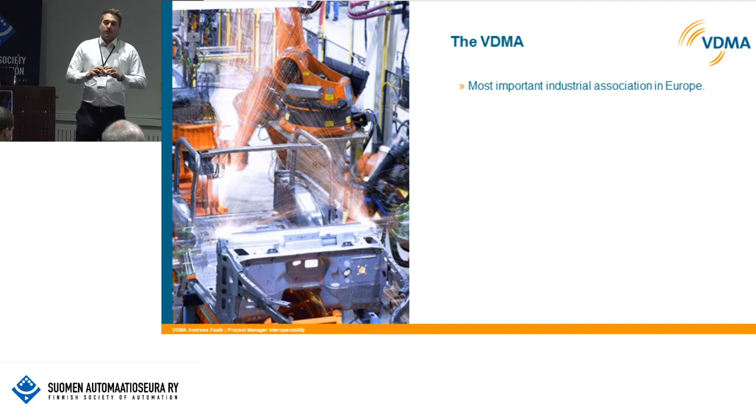We have more than 3,200 member companies, representing the broad range of the manufacturing industry. We have a structure representing the different branches of the industry in 38 trade associations. That means the VDMA is not only covering, for example, the robotic industry or the tooling industry, we cover really the broad range. So we are kind of an organizational umbrella.

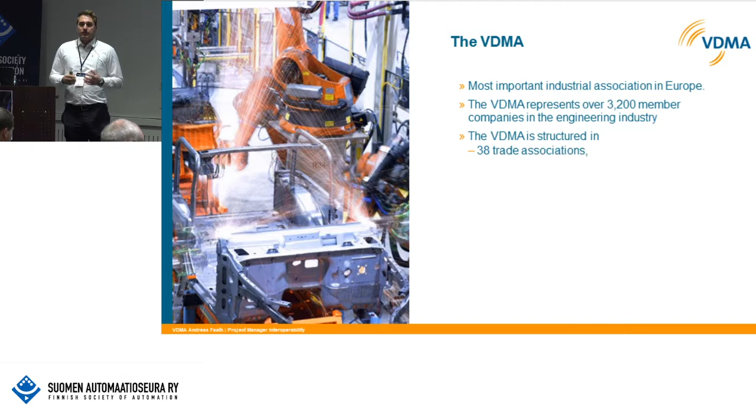Which makes it possible to interact and network closely between different industries inside the manufacturing industry. We are right now an international acting organization, so we have, for example, offices in China, India, Japan, or Russia. And of course there are other kinds of organizational structures, and importantly, we host several European and global sector committees. What that means I will explain also in the presentation.

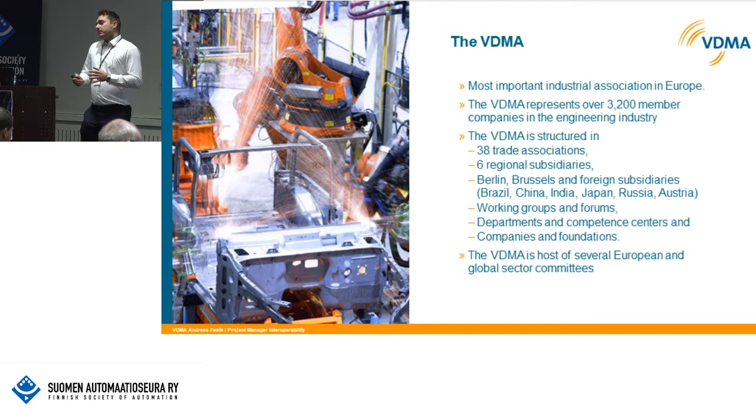So what you have to keep in mind, and what is pretty important, is that as VDMA, as I told you, we are not only representing one branch inside the manufacturing industry, but representing the broad range of this industry. So we were looking for standardized interfaces. We were not aiming just because there is a technology called OPC UA and we wanted to use it somehow. We started with the idea, and our members told us, that standardized interfaces would be key to success. For that reason, we looked for a technology that serves the needs they have.

One of the most important needs, for example, was that there should be a security-by-design approach, and of course a semantic machine description possible. This is why we are taking OPC UA and why we are doing these companion specifications together with our members, and why we are hosting that. Because the big picture goal is really to have, in a dynamic, flexible, intelligent production, the possibility that machines and systems can collaborate, can work, can interact pretty easily by just describing themselves in the production.

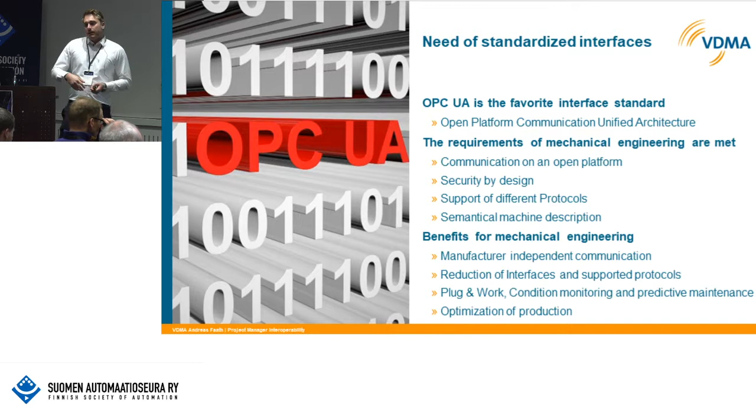So, as you know, OPC UA is based on the OPC UA meta model with some built-in information models, and then OPC UA companion specifications and vendor-specific extensions cover the needs of the industry and individual companies. The OPC Foundation is, of course, a partner of the VDMA in this case, because OPC UA is built and developed by the OPC Foundation, and the OPC UA companion specification is what the VDMA is going for.

So the difference, and also the reason why your machines are not replaceable by just taking a standardized interface, is that there are vendor-specific extensions. What we are doing is kind of like what you did some years ago when your remote control broke down: you went to an electronics market and bought a universal remote control. On that universal remote control, you have basic functionalities like 0 to 9, program shifting, volume shifting, and so on. This is exactly what we are doing with these OPC UA companion specifications.

So the companies meet at the VDMA and discuss what are the basic information and basic functionalities we can standardize without making the product so transparent that the market-relevant differences are no longer existent. This is what we have in the vendor-specific extensions, where, for example, Samsung has a red dot, or Sony or Panasonic, and this red button always does another function for the different TV vendors. So this is how you can bring your market-relevant information on top of the standardized basis.

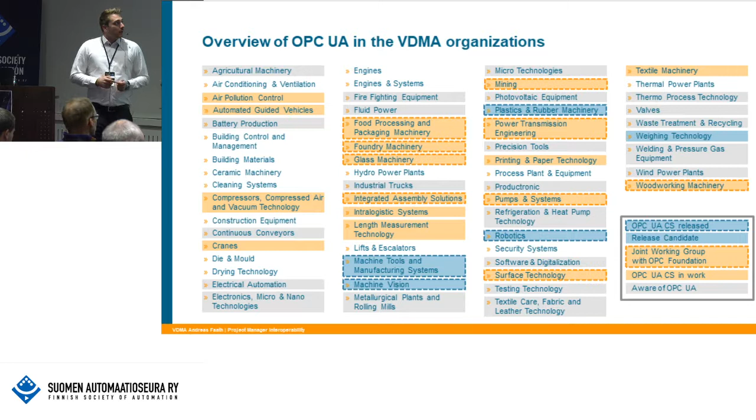So right now we've got more than 450 companies who are actively developing OPC UA Companion specifications, and more than 26 working groups are right now inside the developing process.

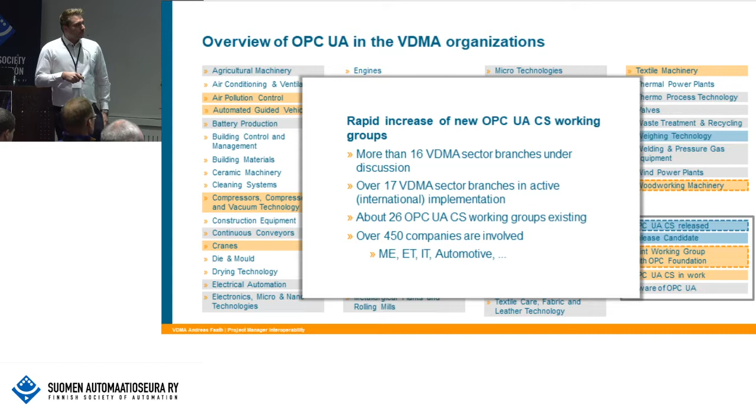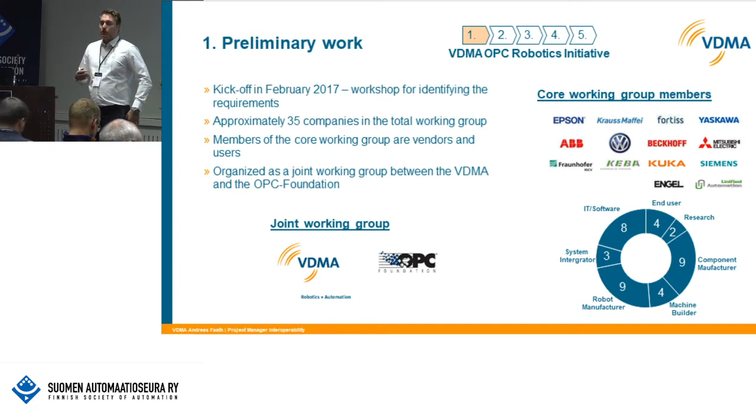So of course those companion specifications don't fall from heaven. That means we have a process. In this process we have 5 major steps, and I will explain the major steps shortly using an example from the robotics group. The robotics group's preliminary work started about 2017 in February with a core working group, which represents not only the manufacturers themselves, but also, for example, the end users such as VW.

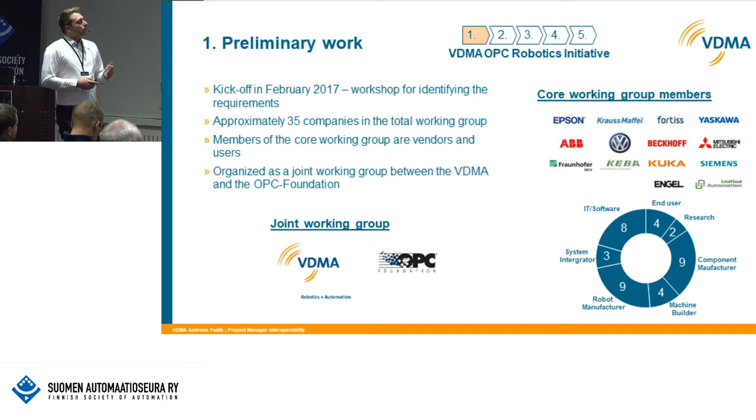And they were thinking about how they should get an OPC UA Companion specification developed for robots. During the content work, they made clear that their goal was to have a scalable, extensible information model which is independent of robot type characteristics. That means if I ask you now to think of an image of a robot, I'm pretty sure you have totally different robots in mind. Some of you maybe have a 3-axis robot, some of you maybe have a 6-axis one. So what they had to think of is how they should put the development on a more abstract level to cover all the different kinds of robots in one specification, and to cover all the industrial robots, mobile robots, and whatever else is on the market.

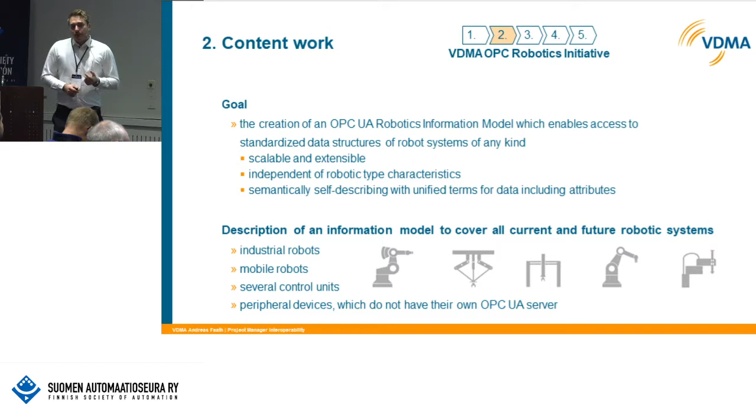So they figured out that they'd describe a motion device, because all the robots you have in your imagination are motion devices. The basic and most important functionality of that is doing a motion. So they called it motion devices, and if you have more than one motion device acting together, it's a motion device system. They agreed, as a lot of other working groups do, to proceed stepwise. That means in part 1, they were just going for vertical communication, getting information out of the robot for use cases like condition monitoring and asset management, while other use cases, for example state machines or control of the robot, will follow in subsequent parts.

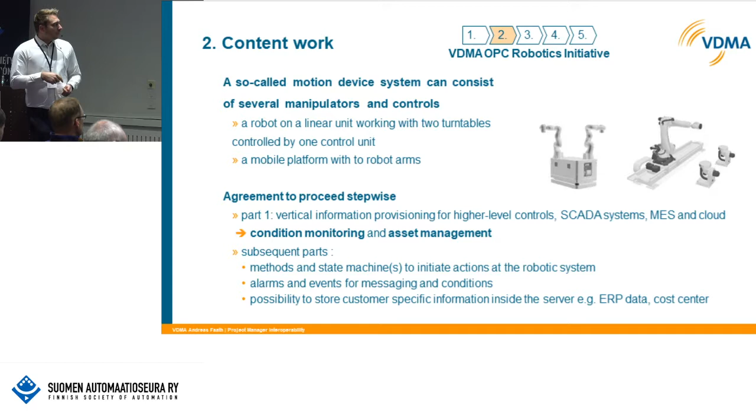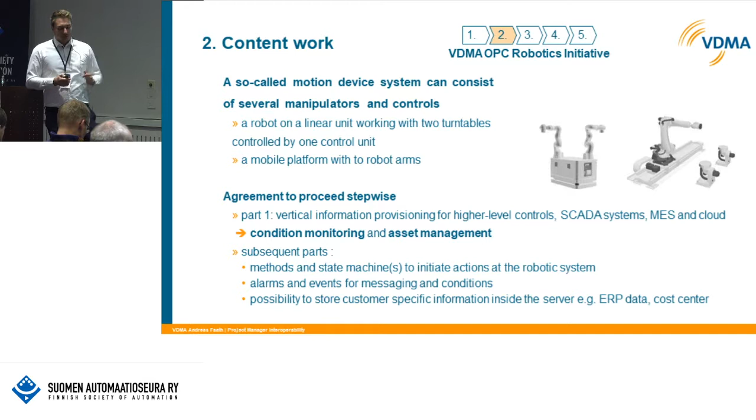So it's not like our specifications cover the whole bunch of use cases which a machine can fulfill. It is more like a detailed development of a specific field within the whole bunch of use cases that, for example, a robot can fulfill.

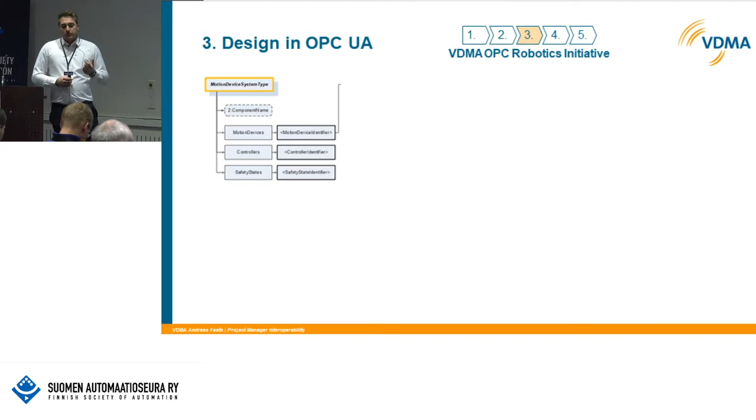So the next step is to design that in OPC UA. And if you think about OPC UA, this is of course an information model. So they started to think, how should we describe a motion device? A motion device can be described component-oriented, because all motion devices are somehow built up of the same components. Those components are the motion device itself. So we have the motion device system, which can contain more than one motion device. Then we always have controllers and safety states.

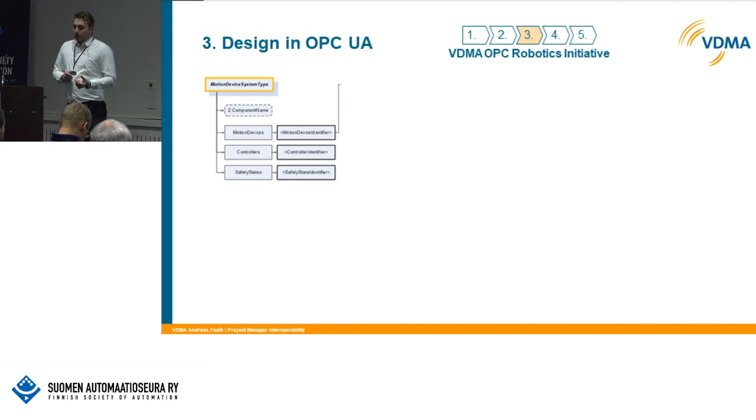And on the example of motion devices, they thought about what components all motion devices have. This includes, of course, some parameters like the manufacturer name and so on, but also, most importantly, axes and powertrains.

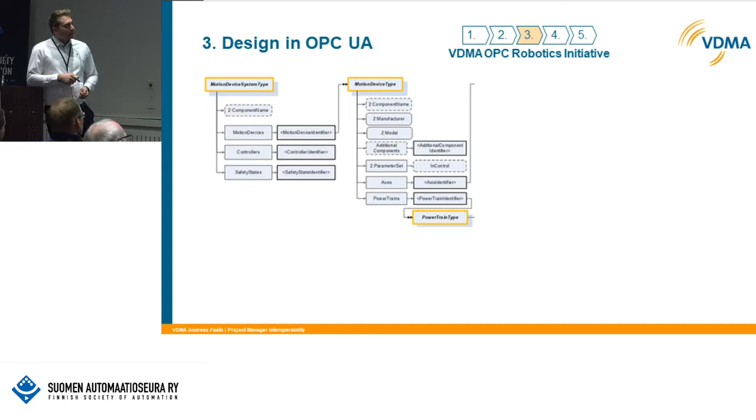So they did an axis identifier object type, where, for example, a motion profile or a parameter set is inside. And also for the powertrain type, they have a motor type and a gear type. So now you can see, if you have, for example, 3 axes, you just can take the axis type and instantiate that 3 times.

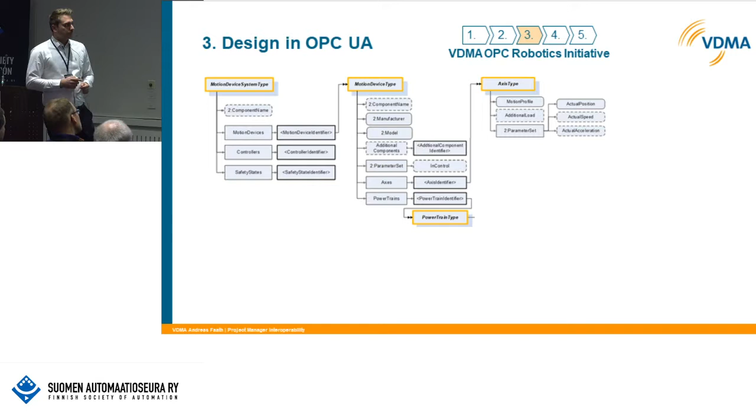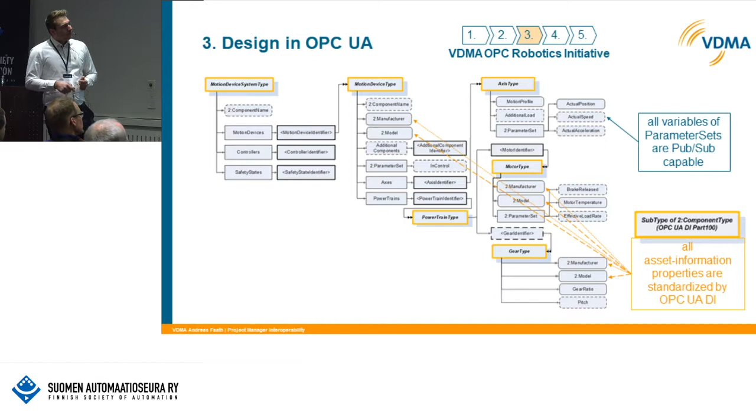So you can represent your axis independent from the robot manufacturer in the same way using the information model. And all the variables are pub/sub capable, and they derived a lot of variables and types directly from the device integration specification which is available. So this is one part here, as I told you, about condition monitoring and asset management. And they decided to do at the first step a component-oriented approach.

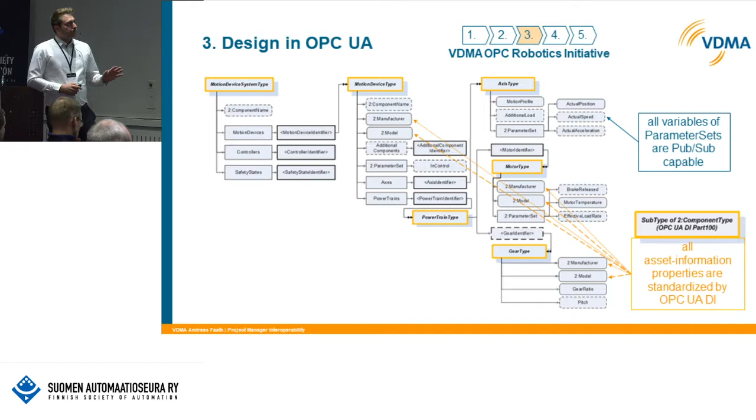How do we bring that into the publication? There's a homepage, and this homepage serves as a kind of basis for our working groups for self-description. Each working group has its own short article representing themselves and telling you what is our goal, who we are, what do we want to do, what are maybe our next demonstrators or whatever. And secondhand, we have a download area for companion specifications.

In that download area, you can download the released specifications, but you can also download the release candidates. And for those release candidates, it's pretty important for us that you all give us comments, because we are opening the process to the public and asking for ideas, comments, whatever you want to give us as advice. Because we want to make sure that everybody who may take the companion specification later on has a possibility to bring his needs inside the specification and the development process. So check out which companion specifications and release candidates are available here and give us comments, and maybe we can bring that into the specification before we release it.

We bring that into use in the industry, and what we were doing there is demonstrators. So the robotic group did a demonstrator which was shown first at the Automatica Fair in summer 2018, and they were connecting robots which were live running on the booth from the specific vendor on the fair, connecting them using OPC UA and the companion specification to an interface on the Microsoft Azure Cloud.

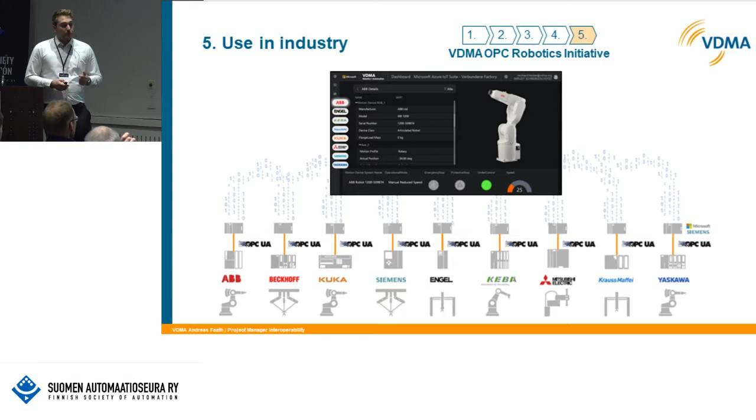For consistency, this means that the different groups have their special interests, and this is all fine because you cannot describe all machines with the same information model. But what we're trying to have is a more interoperable way between the different branches, so that information which is comparable for different branches, like injection molding machines and robots, both have a manufacturer. So it's critically important to find a way that both branches are describing the information on manufacturers the same way.

So for that, we have a central coordination, and we are doing a lot of harmonization between the different companion specifications. And this is exactly where I said in the beginning, the VDMA serves as an umbrella for different branches. Right now we are mostly doing companion specifications, information models for the specific branches inside the association. But where we are going is that we have also industry interoperable communication, so that common information will be defined the same way for all the different branches inside the manufacturing industry.

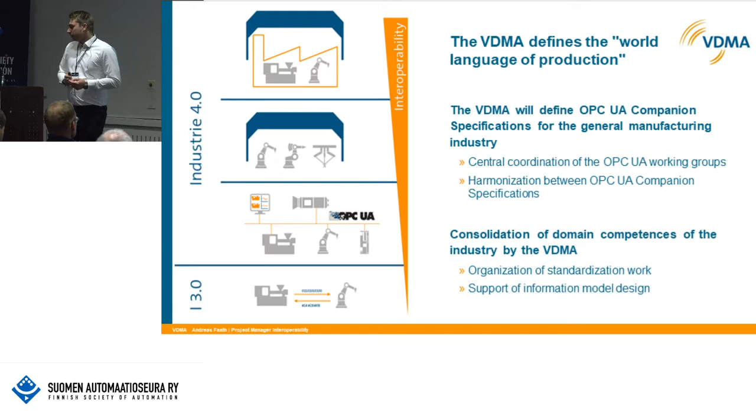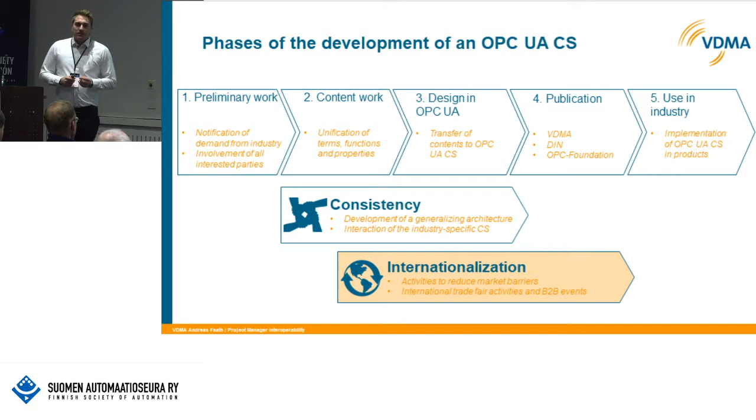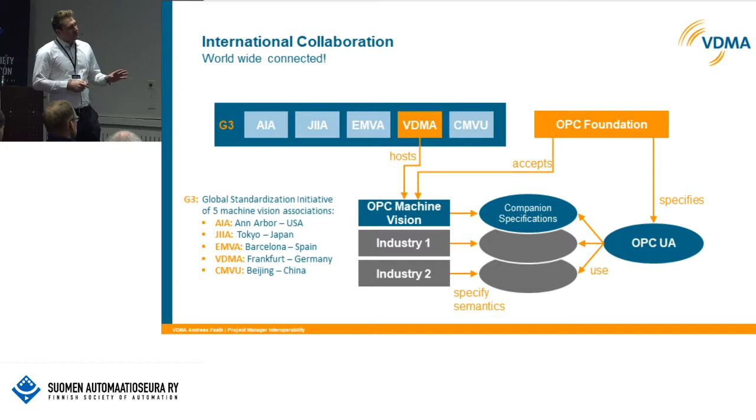And for internationalization, I will skip right now to the machine vision group, which is a totally different approach from the component-oriented approach from robotics, because a machine vision system is not that easy to describe out of its components. So normally, a little bit different in this case, but normally we have a collaboration together with the OPC Foundation. That means we got OPC UA as a technology, which is specified by OPC Foundation, and OPC UA is taking companion specifications to have standardized information.

Those companion specifications are developed by groups like OPC Machine Vision. VDMA is hosting those groups, so we don't own the groups, and we don't own the specifications either, because they're free of charge and publicly available. The OPC Foundation accepts those groups because we do joint working groups. That means if you're a member of VDMA or the OPC Foundation, you can join the groups, and not only give us comments after the release candidate, but also during the development process right from the beginning. After we set up the joint working group with the OPC Foundation, you can sit with the group, or call in, or whatever. You can get the information and also develop the companion specification together with us.

For machine vision, as with many groups, there is a more international approach. It's not only VDMA and the OPC Foundation, it's also, in this case, the G3 organization. G3 is a global standardization initiative for machine vision, with international associations from the US, Japan, Spain, Germany, and China involved. They started from scratch as an international group with a promise to bring machine vision systems into use in those areas of the world, and hopefully beyond. They had more than 60 companies involved worldwide and more than 100 participants — a big group with a core team and a total working group developing the specification for machine vision systems.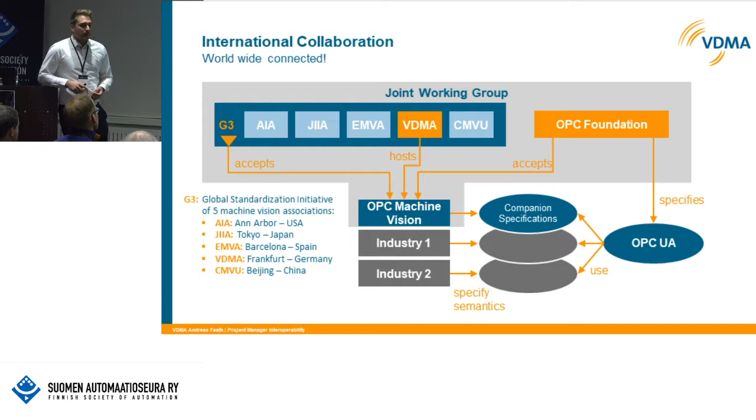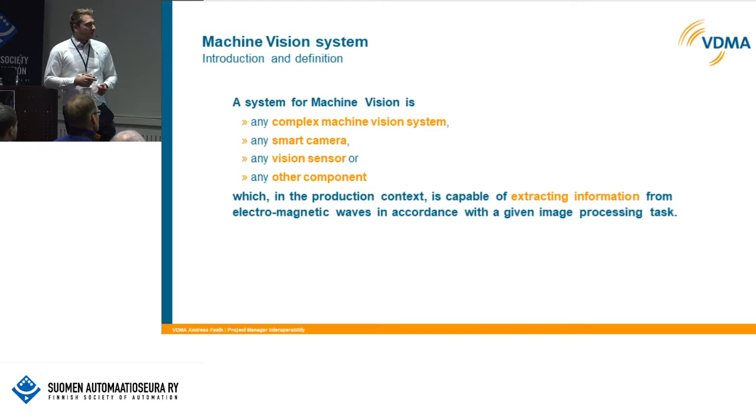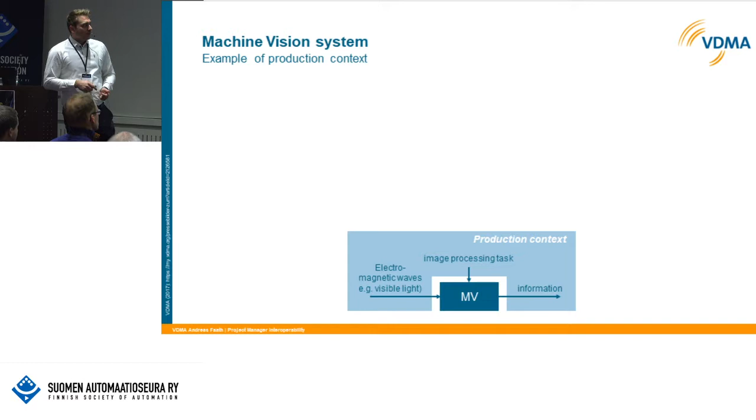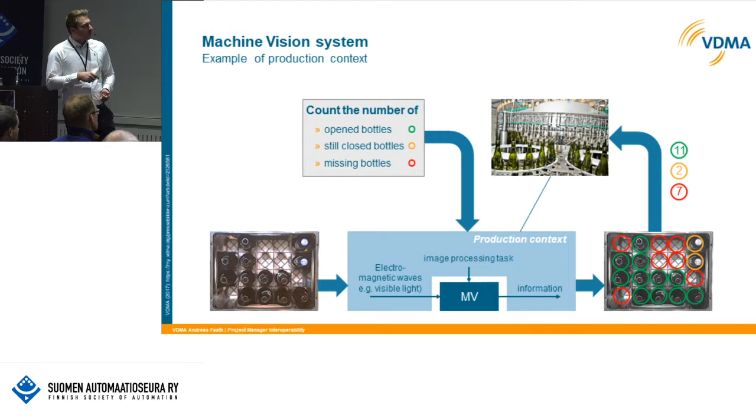A machine vision system itself is any kind of smart camera, vision sensor, or complex machine vision system. So how do you create a specification, a standard, for such a broad variety of machine vision systems? What they have in common is that they change electromagnetic waves using an image process into information. That means they get a picture, with a task to see, for example, where a bottle is opened, where it's still closed, or where a bottle is missing. From that, they gain information in the system. As you can see, it's a lot of software-dependent processes.

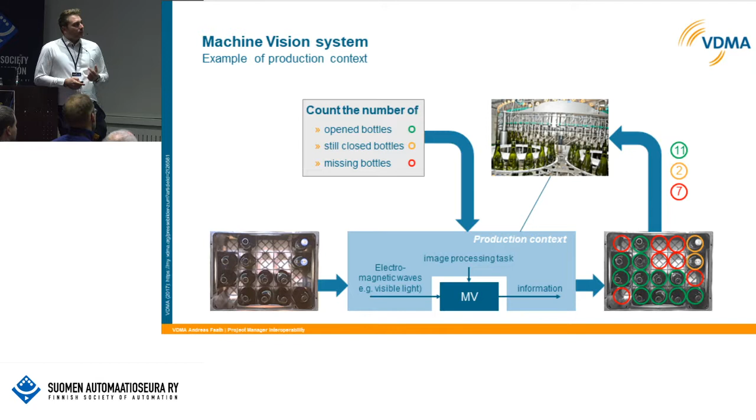So they thought about what they have in common, and they found that they all have a behavior, and they all have data management. That means they all use configuration data, recipe data, or result data. We can't define how the results are represented, but we can say that once we have result data, it can always be managed the same way. The data itself is a black box, but the way you get the data out of the machine is standardized, and also the way you get a recipe into the machine vision system, along with all the configuration data, is standardized — without touching the recipe itself.

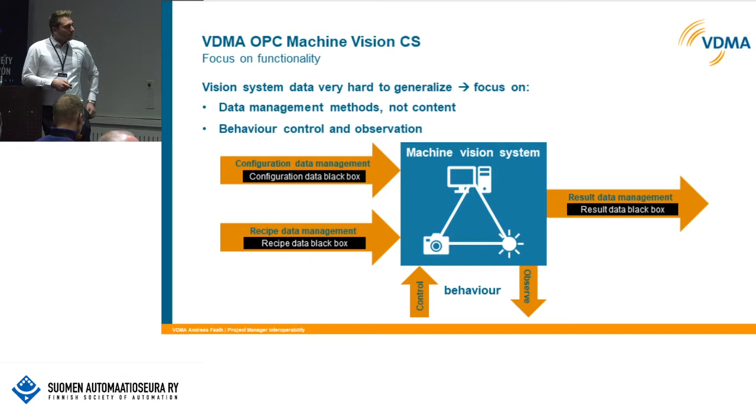That means there are mandatory objects — for example, configuration management, recipe management, result management, safety state management, diagnostic level, and system states — it's all mandatory. It's not the kind of thing where a machine vision system maybe supports those data management standards if it has the OPC UA companion specification on board. It's really mandatory, so as a customer you can count on all of those mandatory objects being implemented and instantiated in your machine vision system.

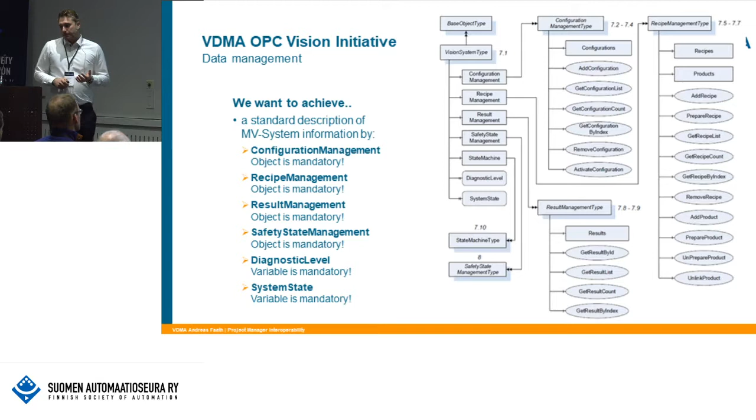For the behavior, they developed a state machine. That means they thought about which states all machine vision systems have in common — which are, of course, pre-operational, halted, operational, and error state. The transitions between the different states are also described in the standard. This top-level state machine is mandatory. So if you're buying a machine vision system with the OPC UA companion specification for vision on it, there is a state machine implemented where you can directly see the states and compare them across different machine vision systems running in your production, independent of the manufacturer.

Behind the several states, there are more state machines on lower levels, which are optional. So maybe a vision system can deliver those states behind the error state, maybe not — that's optional. But this first-level, top-level state machine is always mandatory.

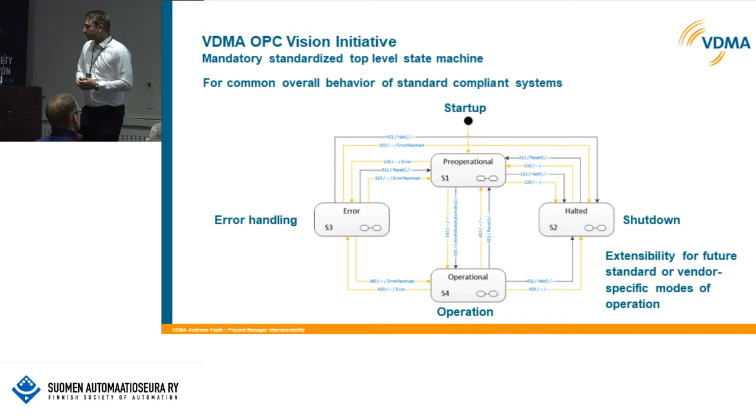So for plastic and rubber machinery, which is the last group, this is also more of an application approach. We had the component-oriented approach for robotics, the more behavior and data management approach, and now we have a more API approach.

That means there are really a lot of specifications called Euromap. Euromap is also, again, a European sector committee like G3 for the world. Plastic and rubber machines have that for the market from Europe. So there are several specifications, and one which is somehow always included is Euromap 83.

This Euromap 83 has general information on plastic and rubber machines. That means all the other specifications derive the general information on a higher level without defining them again and again. So an identification or a manufacturer is defined in here, and it's just derived inside the Euromap 77 where that information is needed, of course.

So Euromap 77 is between injection molding machine and MES. And there are a lot of Euromaps, like 82, which is kind of a series, always having the injection molding machine together with a peripheral device. At one time it's a temperature control device, or a hot runner, or an LSR dosing system. There will come even more specifications, but those are the first three which are right now released or a release candidate.

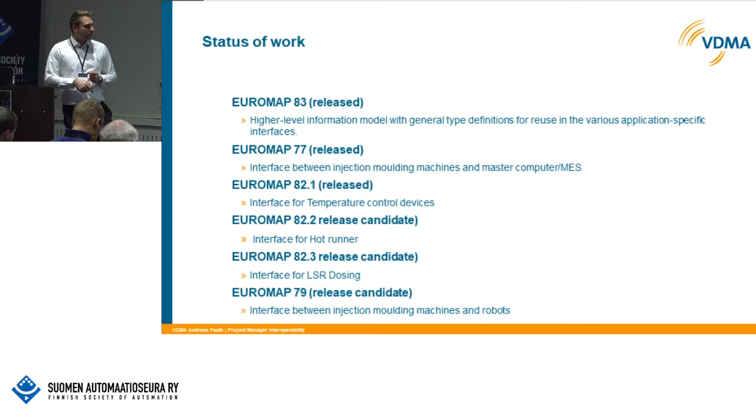And as I told you, there are a lot of specifications, there are even more. There's also the Euromap 84, it's only a one-time Euromap. This 84 is always for interfaces between an extrusion line or extruder itself and, again, other peripheral devices like a hauler, a melt pump, a die, or some of the other ones.

So there are also 11 specifications as a release candidate right now. And we have Euromap 86, which is the interface for material handling systems in the field of plastic and rubber machinery.

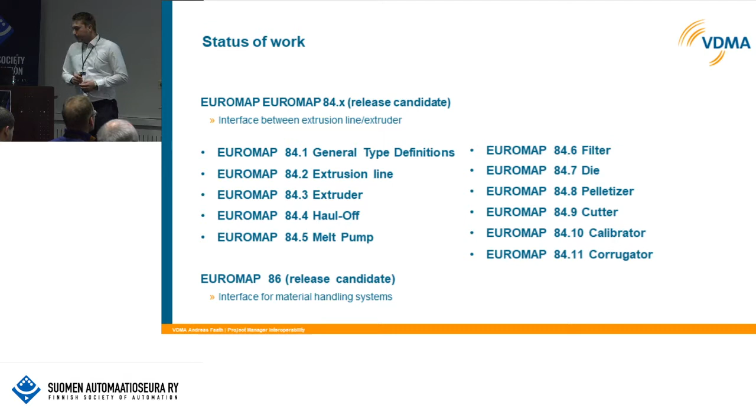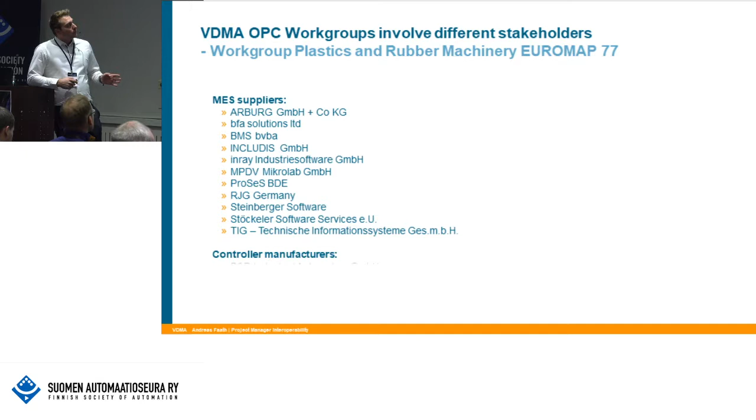So to come to an end, what is pretty important for us, as I told you, is that we are not having only the manufacturers. In the case of Euromap 77, having an injection molding machine interface to MES, we have, of course, the MES suppliers, the injection molding machine manufacturers, the controller manufacturers, and we got one end user called Lego Systems.

So it is really important for us to have also end customers and users inside the groups, because only they can really define what is needed. And it always has to be a kind of mix of all stakeholders later on using the companion specification to get all the needs inside the specification.

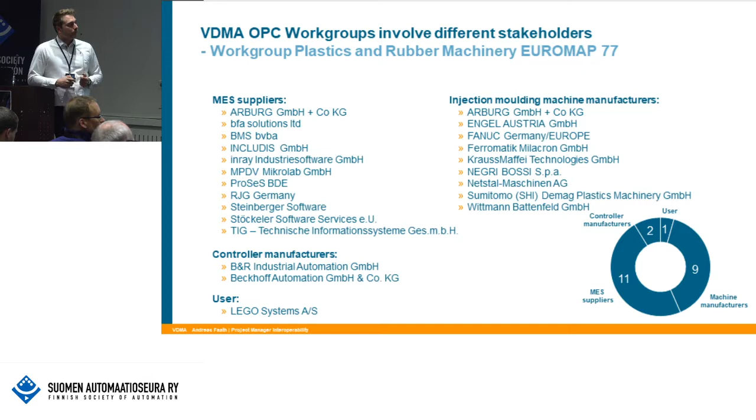The Euromap 77 use cases are, for example, basic machine information, machine status, job management, monitoring of process data, management of production data sets. And this is kind of representative for all the working groups.

So we are always working based on use cases. It's not just about bringing variable information into a standard. It's always about thinking what should be the use case later on for the companion specification, so that you can fulfill a use case later in adoption.

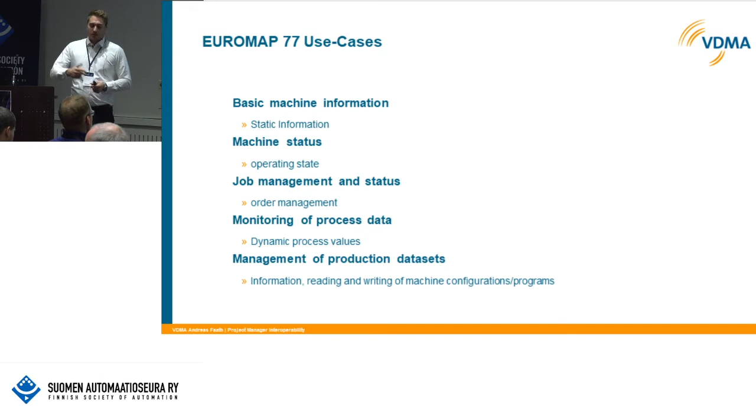And as a last central comment from my side, what we really need to prevent as a community is that we cannot allow competitive standards on the market. So it's critically important for us and also for the OPC Foundation.

If you are thinking about doing a companion specification, or joining an OPC UA companion specification working group, please get in touch with the VDMA or the OPC Foundation, but don't stay in your backyard with some of the manufacturers and just do something and then bring it to the market. Let's work and collaborate here together, and the earlier we get in touch and collaborate, the easier it is later on to not have competitive standards on the market.